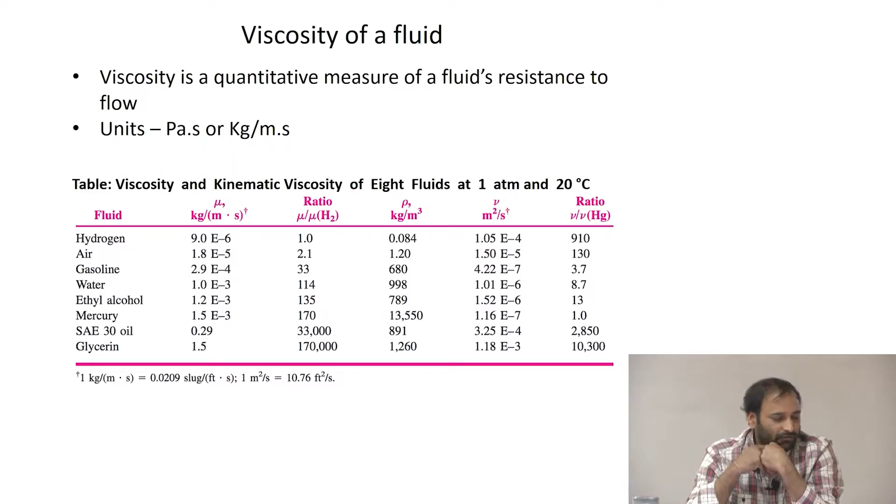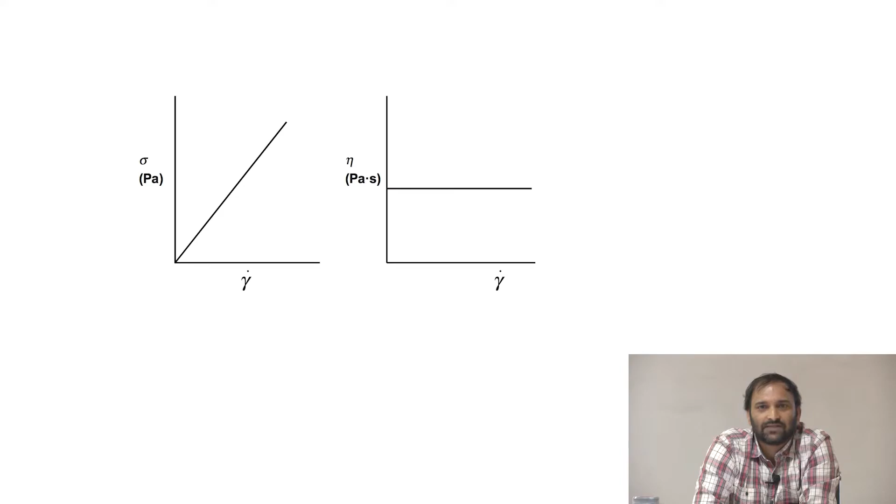Now there are different types of fluids—I'm sure all of you have learned this at some point. There's a plot of shear stress as a function of shear rate, and another plot next to it of viscosity as a function of shear rate. Do you know what typical class of fluids obeys such behavior?

Newtonian fluids, right? All of you have heard of Newtonian fluids—stress is proportional to shear rate, and if you measure viscosity as a function of shear rate, it turns out the viscosity should be a constant. So all of you know about this.

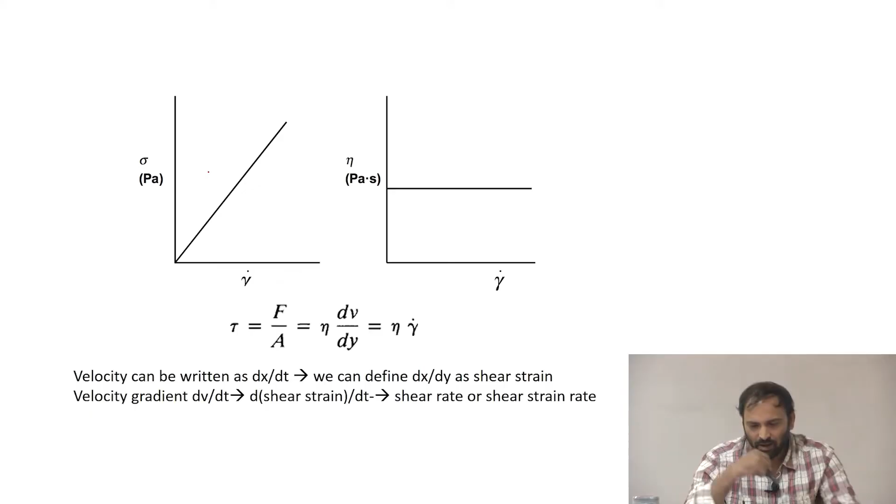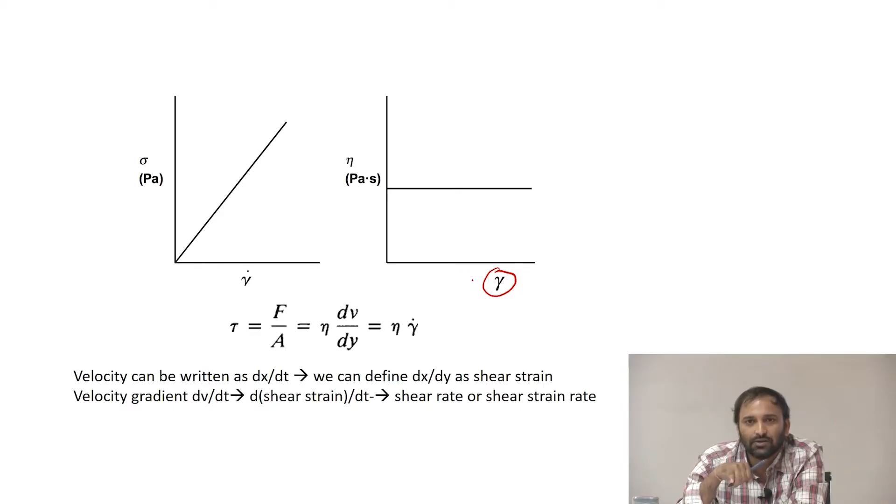If you're not familiar with the terms, you'll see a lot of people use gamma dot, which you see here. Gamma dot can be called rate of shear strain—sorry, you can call it shear rate, or you can also call it shear strain rate. That comes from a simple argument: if you have dv by dy, which is the velocity gradient, I can express v as dx by dt.

Distance by time - the change in length by original length can be expressed in terms of strain. That strain divided by time gives you the strain rate, your gamma dot. People either call it strain rate or shear strain rate.

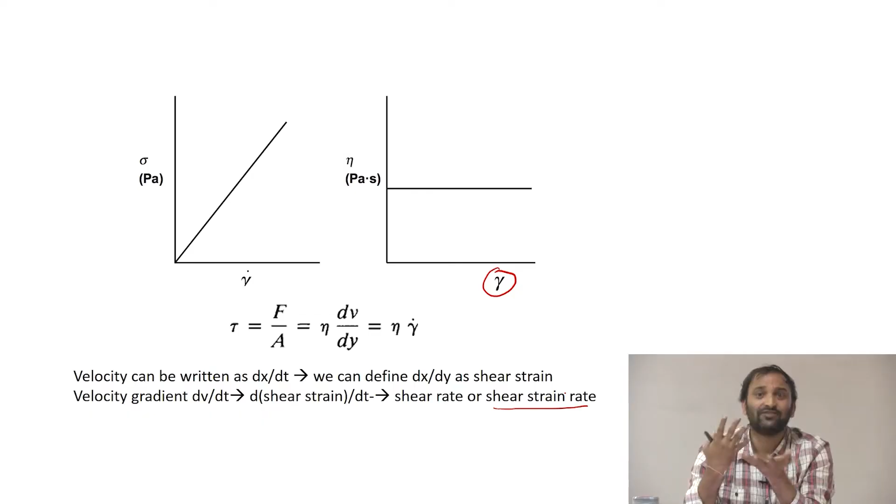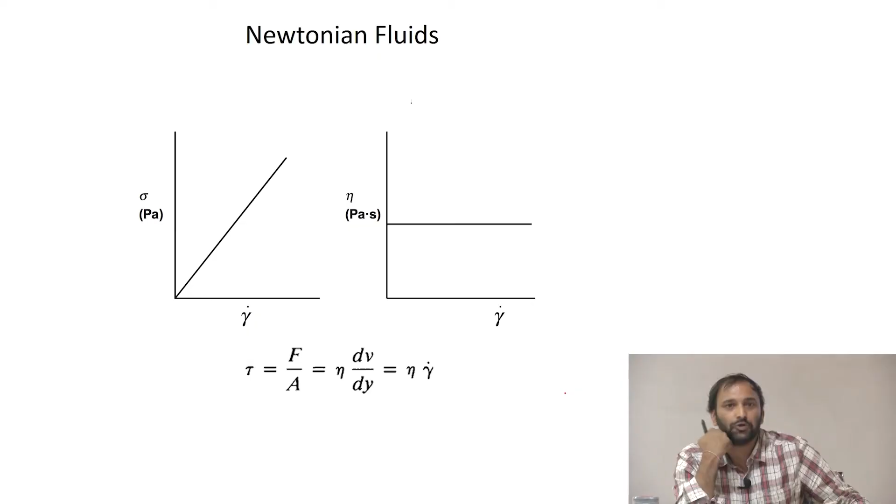Different books use different terminology, and you have to be a little bit aware of these terms. This is a classic case of Newtonian fluids, and it turns out that a lot of things we use are not Newtonian. There are different types, so before going to different kinds of fluids, I want to make a point about something called shear rates that typically exist in different processes.

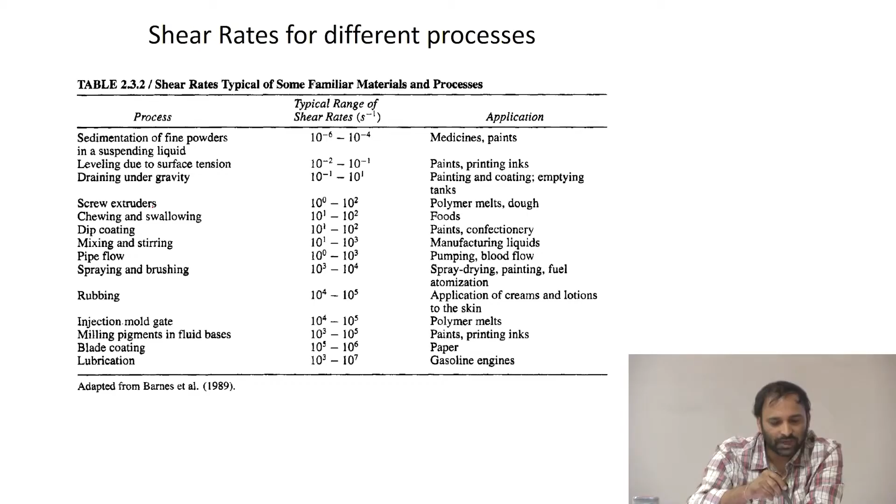So what you see in the first column is a list of processes. The second one is the typical range of shear rates, and the third one is the application. It turns out that depending upon the processing conditions, your shear rates are going to be very different.

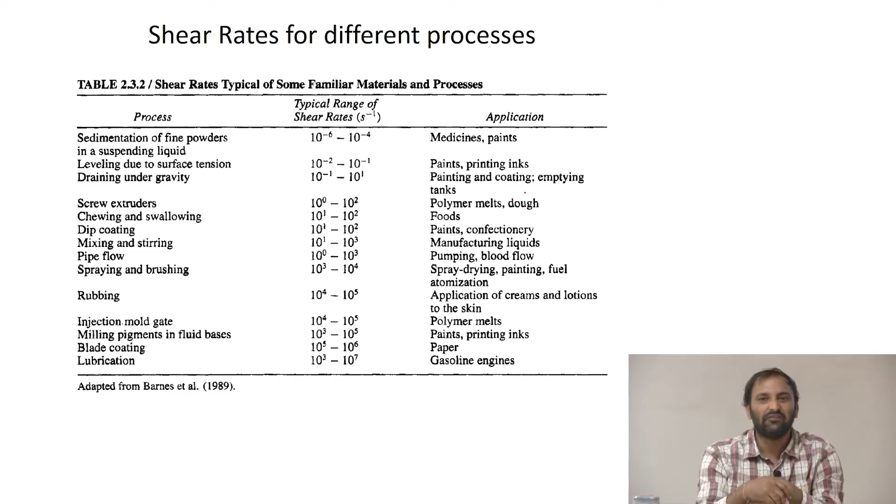What I mean is, if you have a cream that you're trying to apply to your body, and when you put the cream on and try to rub it, the kind of shear rate the material feels is very different than putting oil onto your hair, for example. So for rubbing, the typical shear rates would be 10 power 4 to 10 power 5 inverse seconds. That's really fast - that's a very fast shearing.

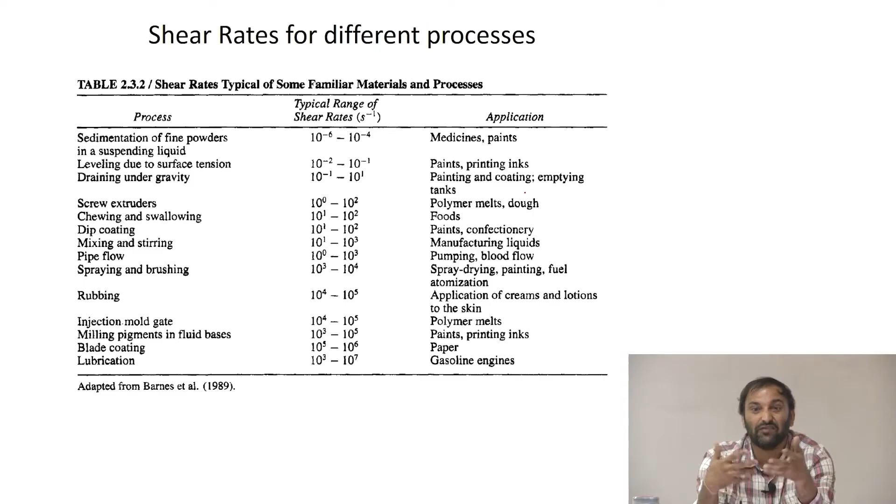There are also other applications. For example, if you look at sedimentation of fine powders, you have a column of liquid and the particles are settling. In such cases the shear rates are very low, 10 power minus 4 to 10 power minus 6 - that's too low. So there's also a need to look at different fluids and have an idea as to how the material responds to different shear rates.

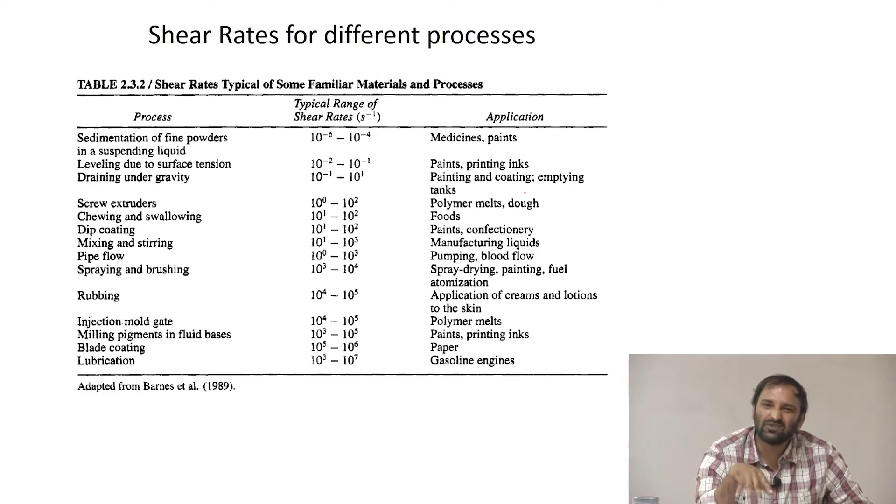So now let's think about toothpaste. Every morning you take your toothpaste, and if you open the lid and want it to fall by gravity, it's never going to fall, right? Of course there are different types of toothpaste, but typically most toothpaste, if you want it to come out by itself, it won't, under the action of gravity. So for it to come out, you would have to apply some kind of pressure.

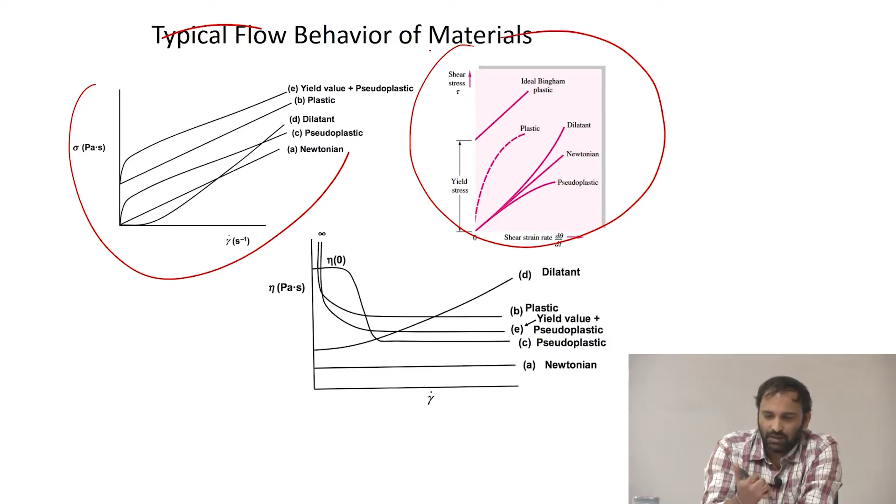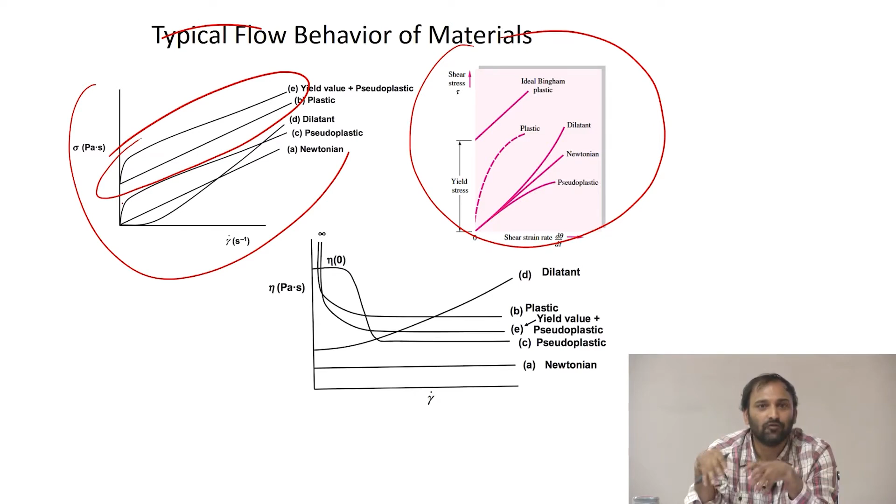Such materials won't come out until you apply a particular force, or until you apply a certain stress. If you look at the class of fluids represented by these two fluids, you clearly see that you'd have to apply a non-zero stress for the material to start flowing. Such fluids are called yield stress fluids, or also plastic fluids. So to flow, you'd have to apply some minimum stress for them to start flowing - those are some class of fluids.

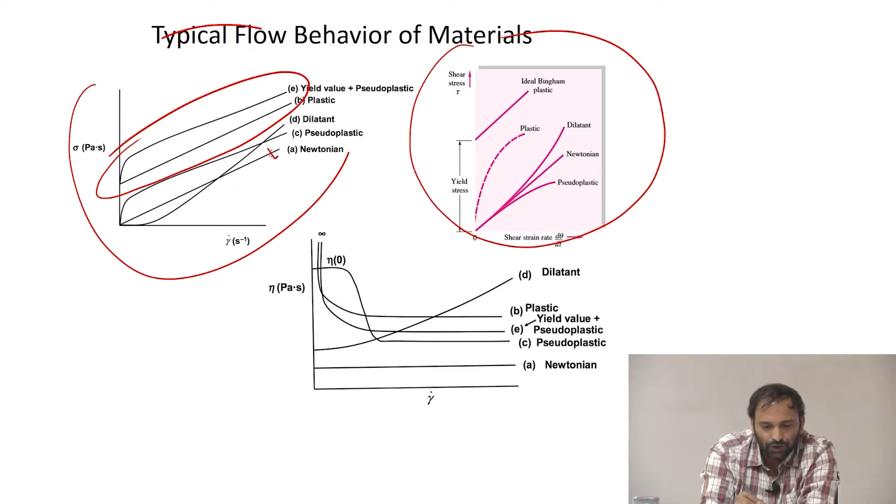Of course, you have the Newtonian fluid, which is very similar to what we saw in the previous plot - your stress versus shear rate is a linear variation.

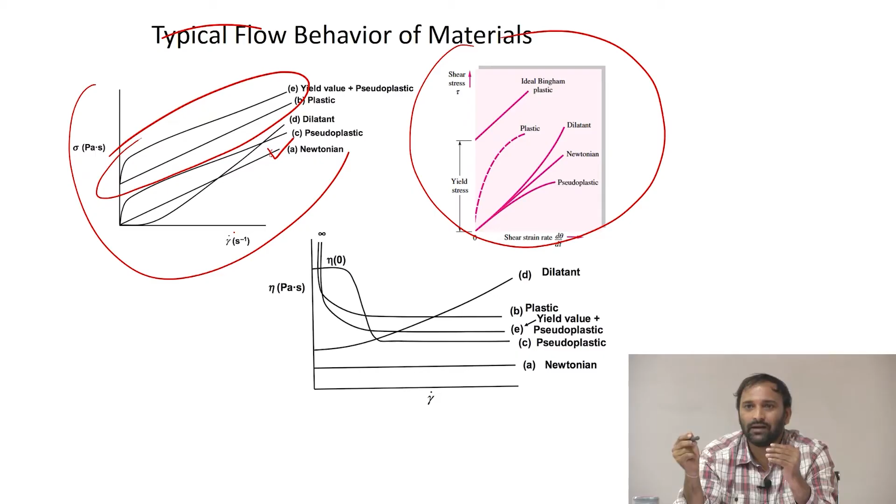That's your Newtonian fluid, and whenever you have this stress versus shear rate plot, you can think about the slope of these plots. At any instant of shear rate, you can think about it as giving a resistance, and that resistance is what we think about in terms of viscosity. Therefore, if I take a Newtonian fluid like here, the slope is constant, so if I measure viscosity, it's going to be constant, because the slope is constant.

Now if you take other types of fluids, your viscosity could be changing as a function of shear rate. For all non-Newtonian fluids, your viscosity is going to be a function of your shear rate.

Now, depending upon whether the viscosity of the fluid is decreasing if you increase the shear rate - if that is the case, such fluids are called shear thinning fluids. These are fluids where if you take them and start shearing them, the viscosity goes down with shear rate.

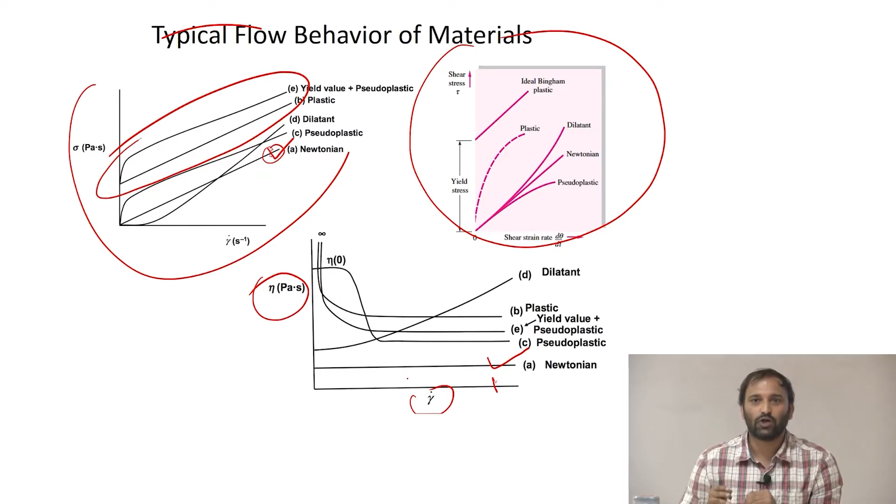On the contrary, there are fluids where the viscosity could increase as a function of shear rate. Such fluids are called shear thickening fluids.

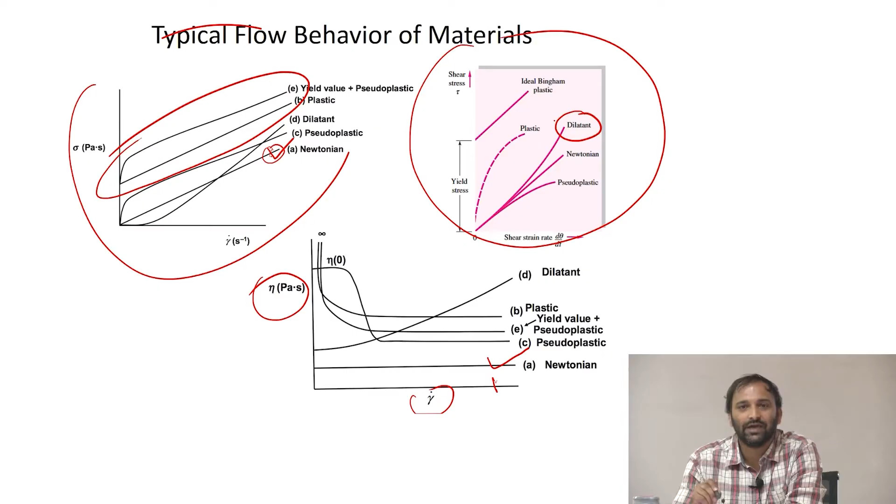So basically your dilatant is also same as shear thinning, and pseudoplastic is also same as shear thickening. I think it's the reverse - I think it's the reverse. So I'm sorry about that.

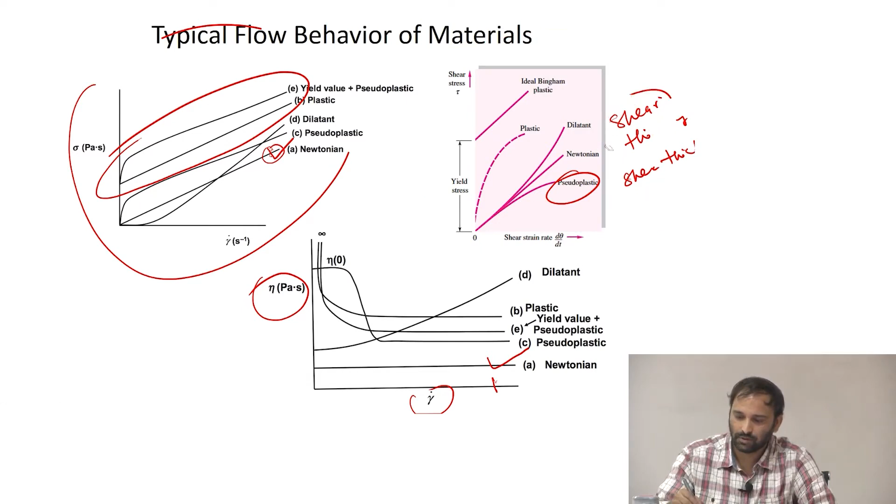It's the reverse, right? Because if I take a slope of these plots - if I take pseudoplastic for example, the slope is initially constant. Now if I increase the shear rate strain, my slope is going to decrease, right? That is a shear thinning fluid. Sorry about that. Okay, that's your shear thinning.

And if I take a dilatant fluid, if I take the slope at different points with shear rate, my slope is increasing. Therefore my viscosity is going to be increasing if I increase the shear rate. They are called shear thickening.

So I just want to make the point that there are different classes of fluids, and their viscosity need not be constant. It could be varying as a function of shear rate, and depending upon whether it increases, decreases, or remains constant, you can think about fluids in different categories. Most of the fluids you come across in daily life or in industrial processes fall into some of these categories.

So now, the question would be: can you think of a fluid that could exhibit all different behavior? One fluid which can be both shear thinning, shear thickening, and Newtonian.

So can you name some examples of Newtonian fluids? A lot of fluids that you use, right - water, honey, for example, all of that. So for them, if you measure viscosity as a function of shear rate, it's going to be a constant value. They're all Newtonian fluids. Any example of some fluid where the viscosity need not be constant?

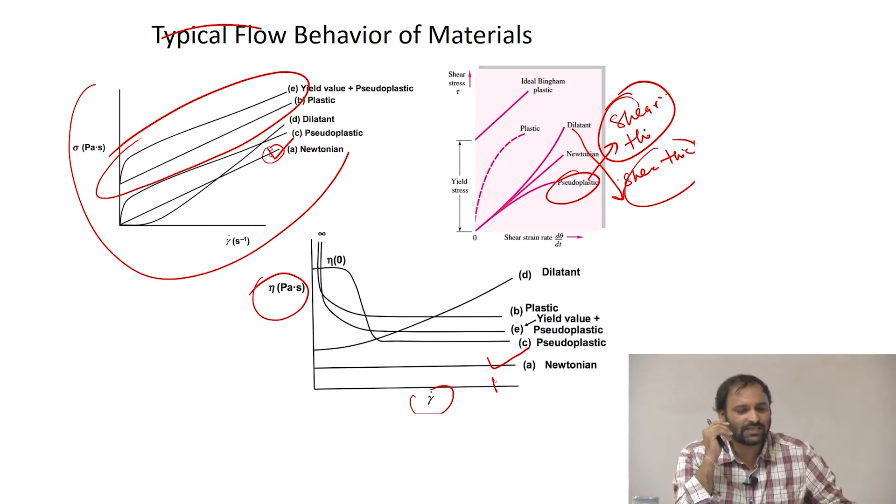So a classic case of fluids which exhibit all these properties in one and the same fluid is an example of something called colloidal dispersions or nanoparticle dispersions. A simple way to think about this would be these are slurries - a liquid with some particles. The particles could be very small in size, nanoparticles, or micron in size, or even larger macroscopic particles.

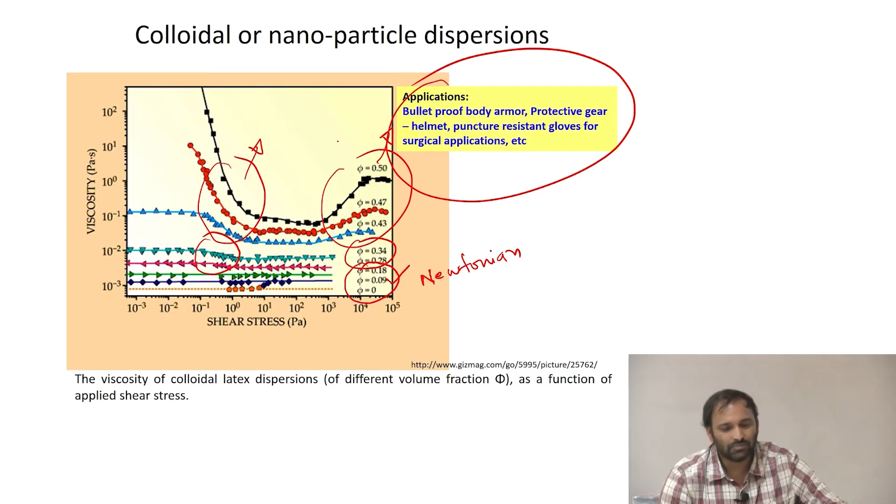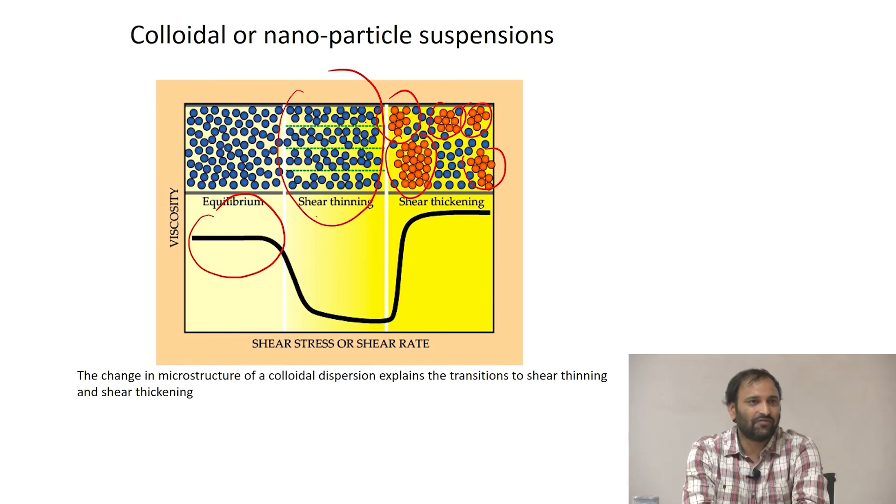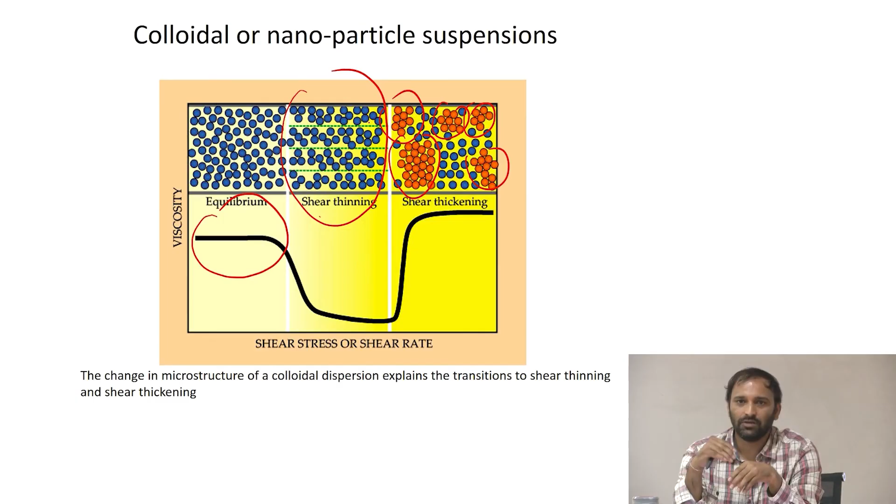Okay, so that's about different types of fluids, just to give you a picture of different classes of fluids. All that we have done so far is discuss what viscosity is, and then discuss different classes of fluids, taking one example of a particular class where you see both Newtonian and non-Newtonian behavior in the same fluid. That's what we have done.